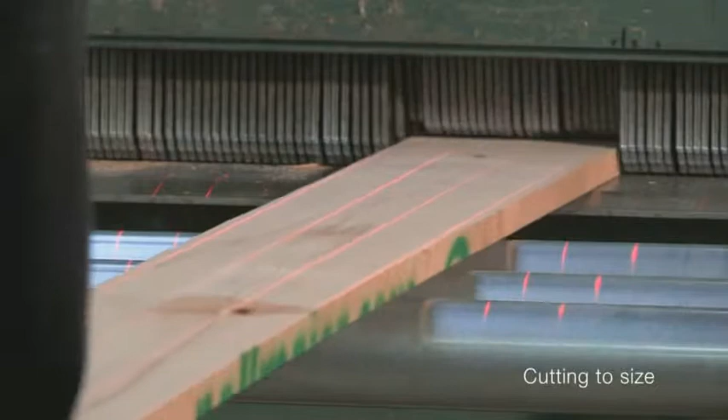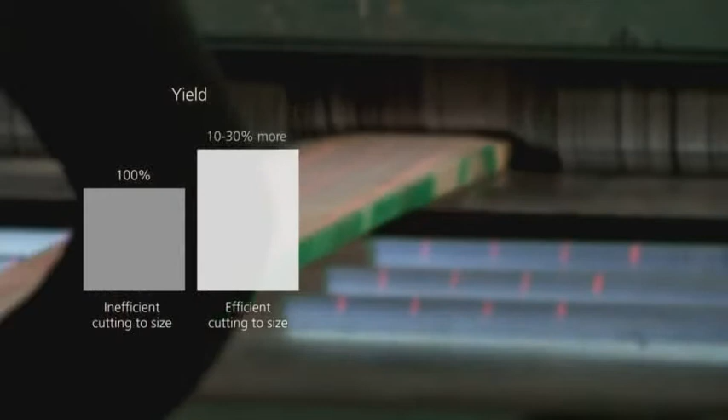The key factor in processing solid timber efficiently and with little waste is the way in which it is cut to size. Only with a high wood yield can low costs be achieved, for the higher the yield, the lower the material costs.

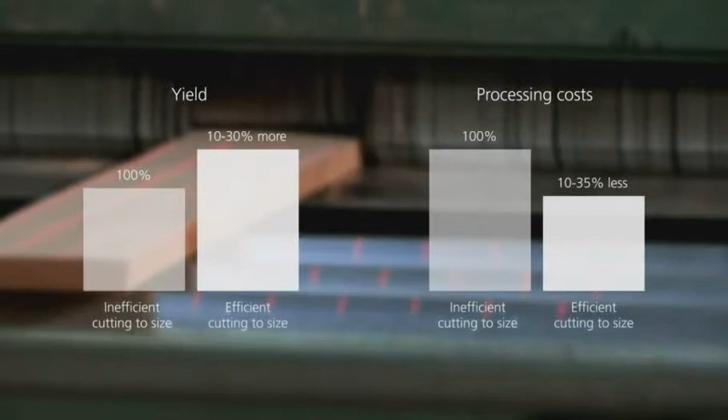Labor costs, too, go down as the wood yield goes up, as more pieces get cut to size in the same amount of time.

We aim to show with this short film how you cut hardwood to size efficiently.

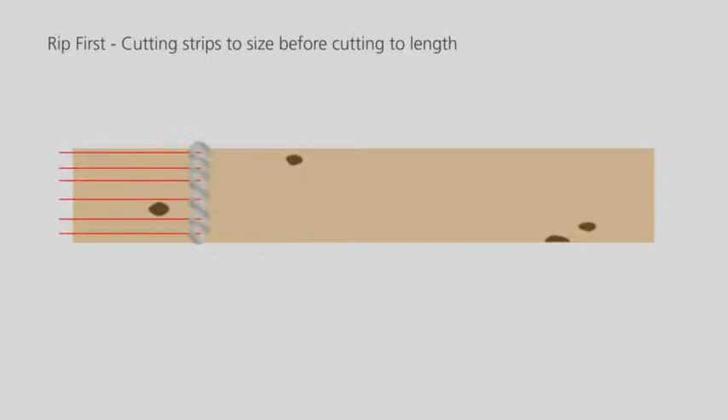Fundamentally, there are two different ways of cutting wood to size. With the first method, called rip first, the wood is first cut to width on a multi-rip saw. Then the strips are cut to target lengths, with defined attributes of the wood being cut out.

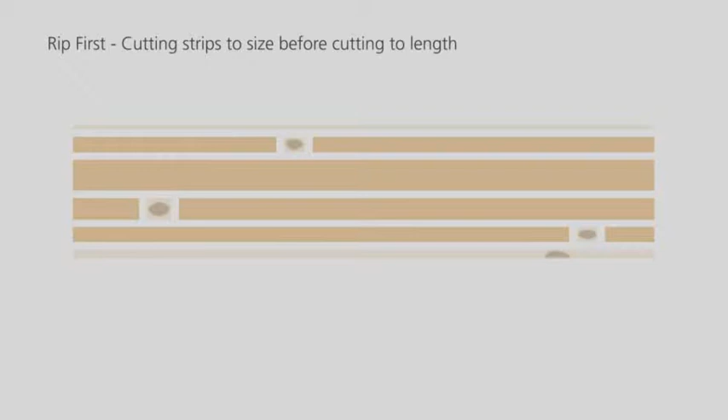This procedure offers the opportunity for a high level of automation through the use of automatic cross-cutting systems, which enables very high efficiency to be achieved, especially if strips are being required in many different widths and lengths. This process has many advantages, as through the combination of these pieces, it is possible to achieve very high yields.

When a high percentage of long strips is needed, this is also the recommended method of cutting to size.

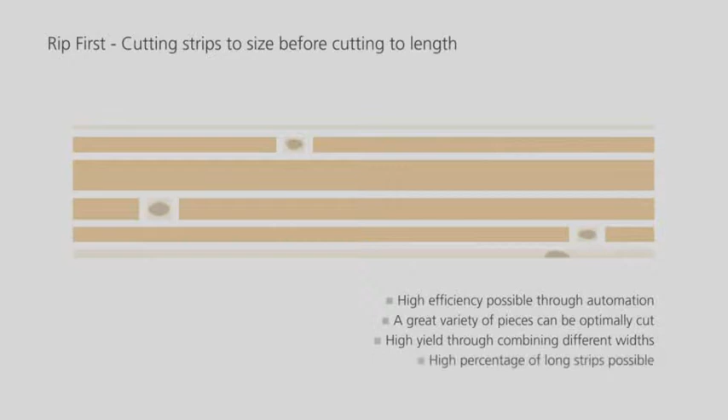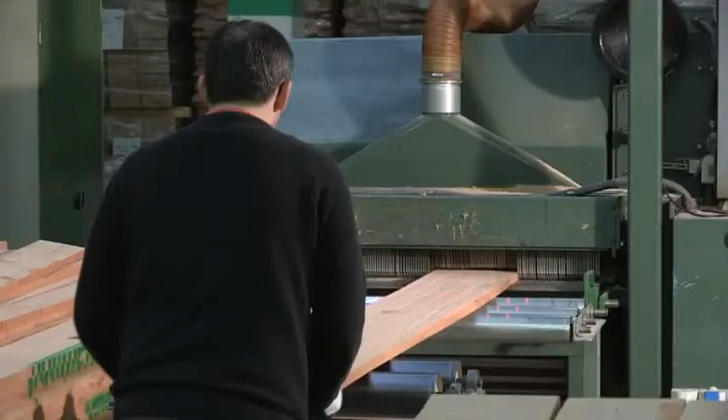Here you see solid wood being cut to size using the rip first method at a firm making edge glued panels. It is using timber of calibrated thickness. No pre-planing is required, and you can begin right away cutting it to the required width.

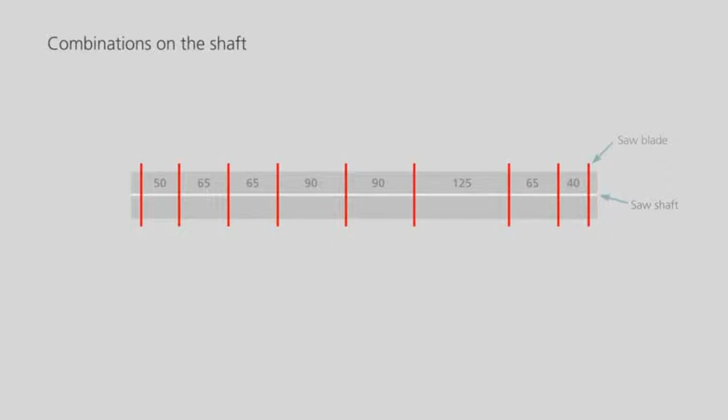Strips of differing widths should be cut at the same time. In the choice of multi-rip saw, it is important to ensure an adequately wide shaft, which allows different possible combinations to be set up, enabling optimum utilization of random plank widths.

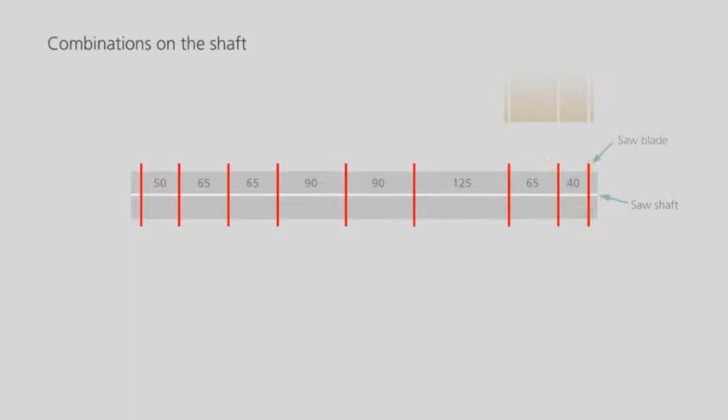Where the width combination is less favorable, the initial timber should be sorted to width in advance or pre-sorted timber bought in.

A laser indicates where the cut will be made and enables the planks to be optimally positioned. Particular attention should be paid to ensuring that the laser is set up correctly.

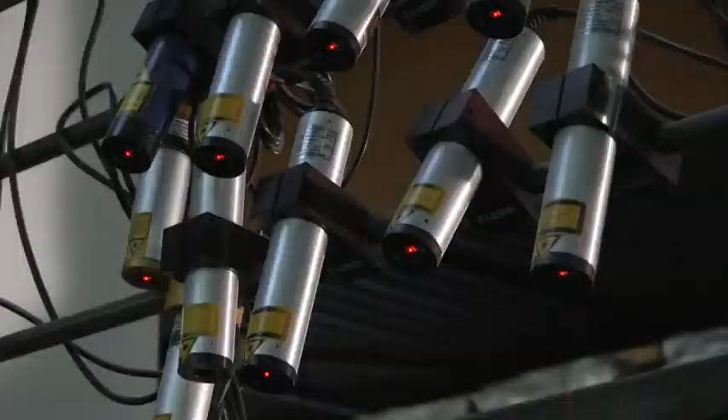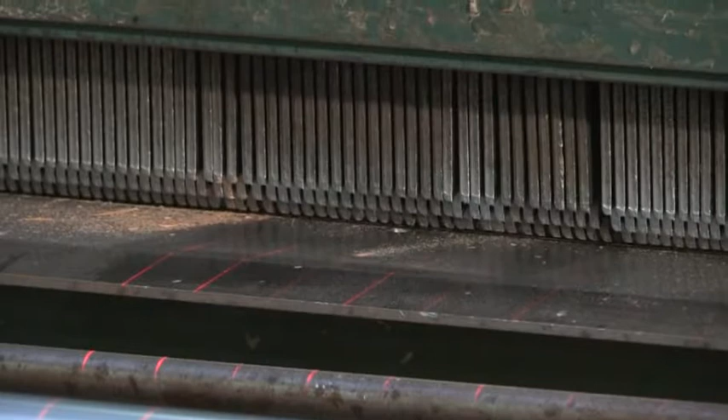In order to achieve a clean, glue-able cut, high-quality, well-sharpened blades must be used, and the feed rate needs to be adapted to the plank thickness. For beech planks of a thickness of 26 millimeters, this is usually 40 to 50 meters per minute.

The cut strips then get automatically conveyed further to the crosscut machine.

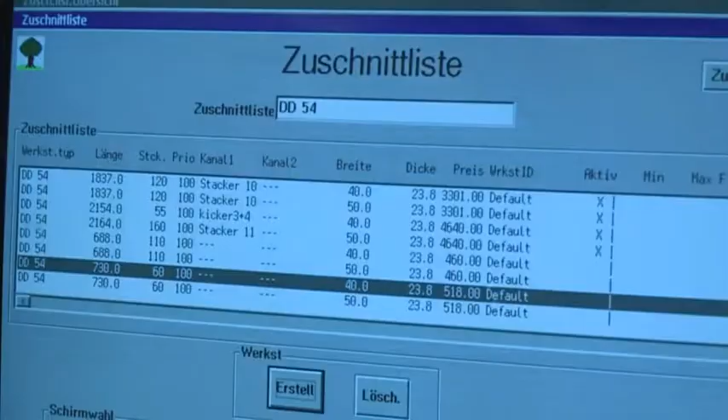Before the cross-cutting begins, cutting lists are made. These define which attributes of the wood are permitted and which need to be cut out.

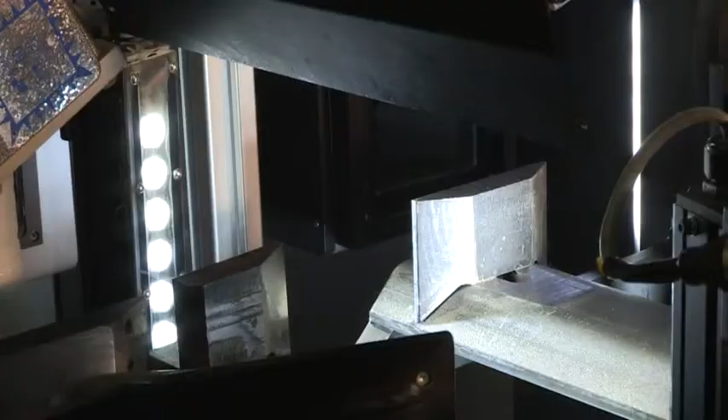The defects to be cut out get registered by a scanner, and the machine then cuts the necessary strip lengths fully automatically, optimizing the wood yield.

On machines without a scanner, the defects to be cut out need to be manually marked with fluorescent chalk.

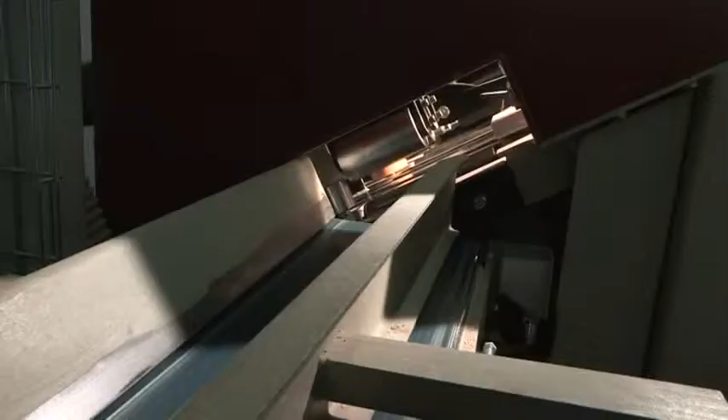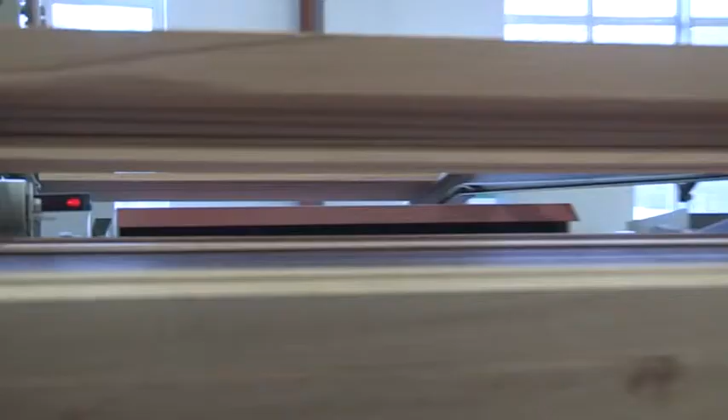Next, the strips get sorted and stacked fully automatically. This high degree of automation enables solid wood to be cut to size very efficiently.

Alternatively, the trimming to length can of course also be done manually using a pendulum saw. However, this method is advisable only if a small number of strip lengths are required.

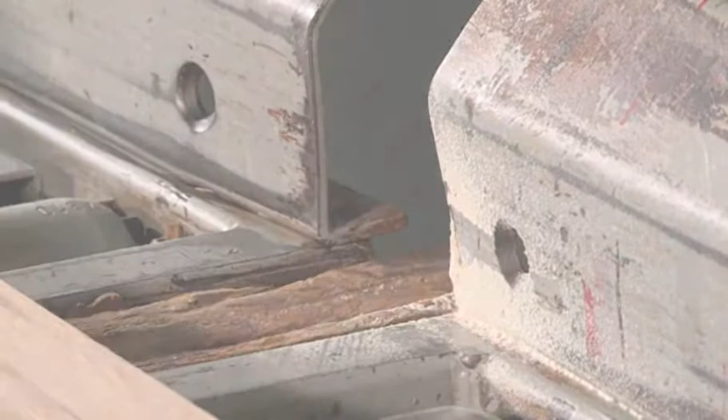If you are planning to reuse the flawed pieces, for example as core elements of furniture components, these should be cut out with a minimum length.

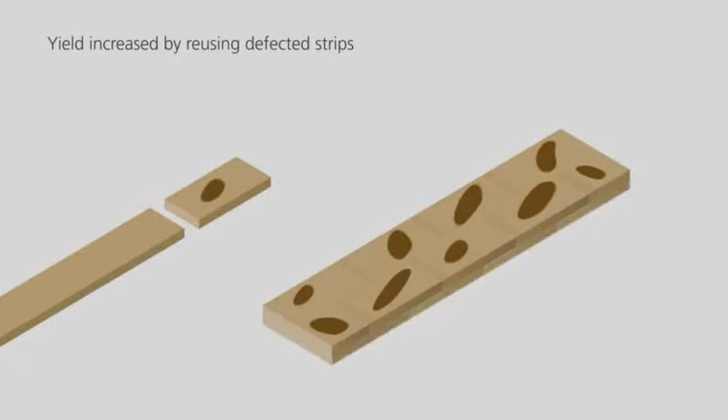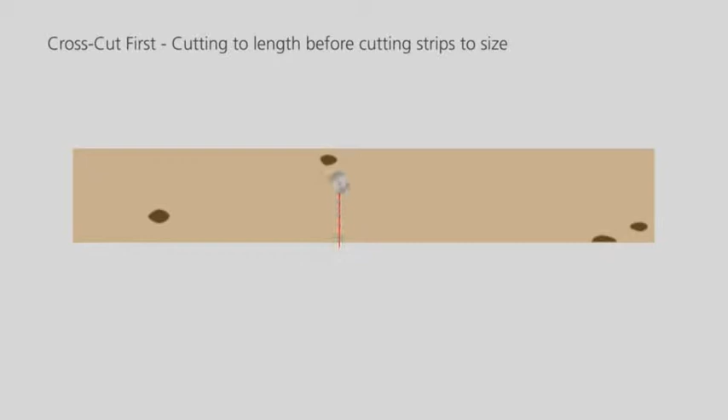In the second method, called crosscut first, the timber first gets cut to length. This is followed by cutting to width and cutting out the non-permitted attributes.

This is a simple method that requires lower investments into machinery. This cutting method is appropriate when working with pieces of similar size and mainly strips of medium length.

An example would be the production of boards made of strips of random width to be used as stair treads or as the raw material for bandsaw jobs.

Also, if the planks to be cut to size are noticeably curved on the side, this is the preferred method.

Here you see solid wood being cut to size for treads at a staircase maker, using the cross-cut first method.

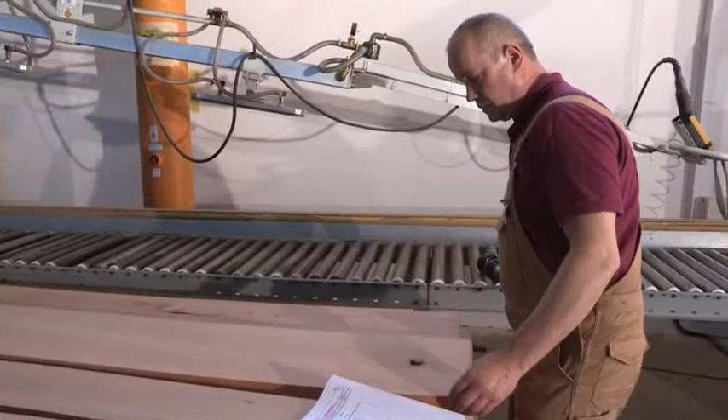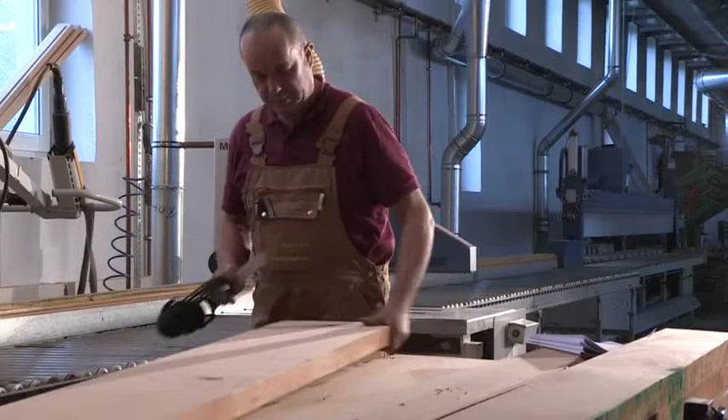For this method of cutting, well-trained personnel are essential. They must be familiar with the required lengths and widths and the wood attributes that are not allowed, which are defined in the cutting list. This generally relates to both sides of the plank.

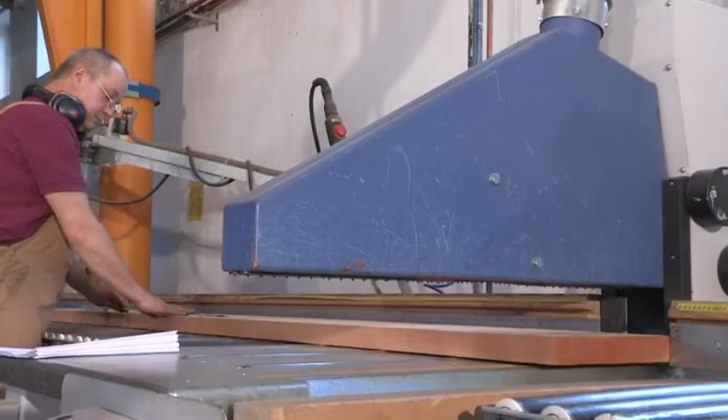First, the planned positions for cutting to length get marked. It is particularly important here to ensure good lengthwise utilization of the planks.

In the crosscut process, some of the non-permitted defects are already cut out. After the planks are cut to length, they get cut to width, with the remaining defects getting separated out.

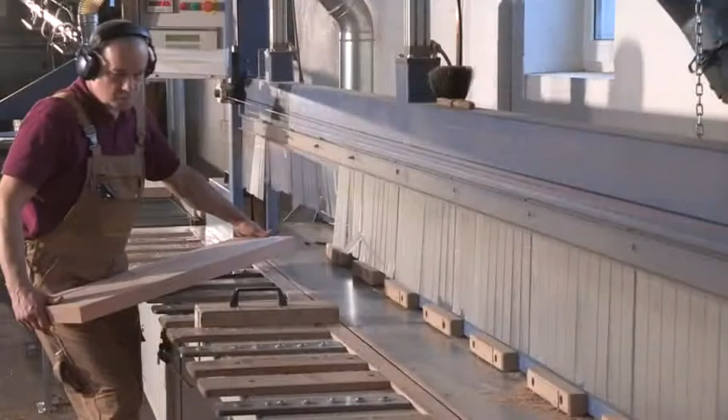This simple method is suitable when working with pieces of similar size and mainly strips of medium length, and for producing boards made of strips of random width.

In order to cut solid wood to size efficiently, you naturally also need the right raw material. Pollmeier beech, one of the most popular hardwoods, is highly appreciated for its ease of processing.

The square-edged beech timber is kiln-dried to the optimum wood moisture content of 7 to 9%. A conditioning phase ensures a high level of stableness.

After kiln drying, the planks get pre-sanded on both sides, making all defects of the wood clearly visible. The planks are also completely straight and flat, not hollowed or warped, a valuable prerequisite for efficient cutting to size and further processing.

Pollmeier beech is available in 18 grades oriented to different applications. We can thus offer you the optimum grade for making your products. We look forward to supplying you.